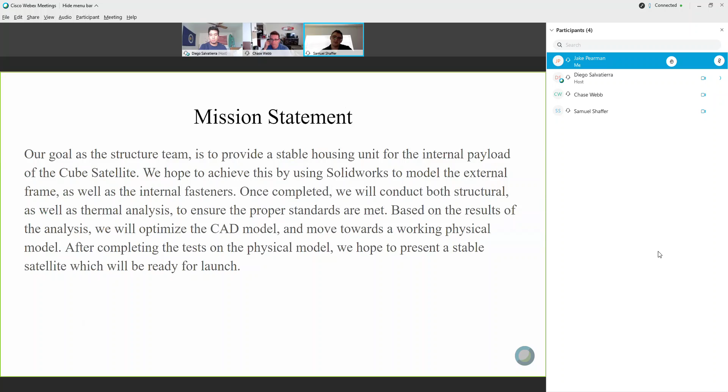Right, so there's specific property tables that have been researched for the specific types of PCB boards. So we chose the most common one for this application, which would be like an FR-4 board. And we basically took those properties and we put it into a custom material so that we can get as close of a resemblance during our testing and things like that.

So I'm going to be speaking on the design, the draft, and materials concerning the design and model for our CubeSat frame. What we have here is version 4.1 of our drafts for our CubeSat satellite. We've actually right now progressed marginally forward to 4.3, where we have standoff shelving on the internal structure of the arms for the spacing for technologies and experiments.

It's irrelevant to the design, so we decided for drafting purposes to stick with the 4.1 draft for this area. Mass is only varied by about 5 grams without the standoff attachments to the arms. So as of right now, you have on the left side of your screen the full assembly, which is set up by a trimetric perspective, as well as the front, bottom, and top views.

Moving to the right here, we have the main assembly frame components. PCB board being a vertical component and a horizontal component, where one length is longer than the other one. Then you have the vertical assembly arm, and below that are the top and bottom panel, which are exact copies of each other, just mirroring each other on the Y plane. Now, the vertical assembly arm is actually faceted through the perpendicular plane of the top bottom panel.

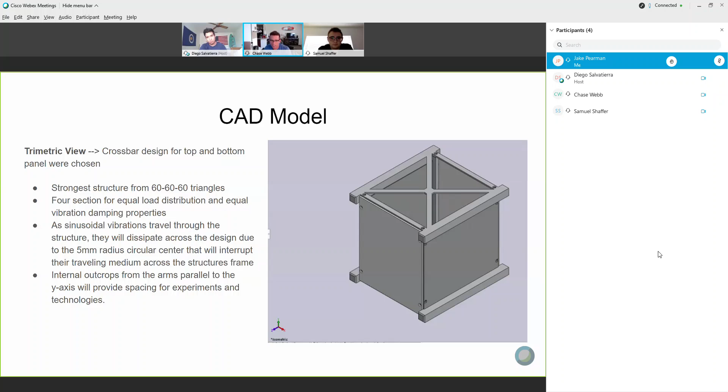Now, after some market research and industry analysis, the production of the CubeSat will most likely have to be done with a CNC milling process, which will include the 6 parts, 4 arms, and 2 top and bottom panels, all made from aluminum 7075 T651, which will be anodized at finish, and we'll have the deployer arms, which are the outer ends of the top and bottom panel, brushed. The metal will be brushed so that they will be compatible with the deployer system in the ISS.

The machining will probably be the most expensive part of the process, but after going to different manufacturers across the European Union and the United States, we do meet nominal requirements and minimal tolerances for manufacturing. These CNC companies do require minimum thickness, nominal tolerances, and minimum drilling spaces.

And as of right now, I haven't encountered any problems with our current dimensioning and their minimal requirements. So as of that, we're compliant with manufacturing standards so far and knowledgeable of their requirements. Next slide, please. Actually, I'm quite sorry. One slide, please.

Did not touch on this, but the rough estimate for our CubeSat cost, including materials, production, CNC milling, anodizing, and brushing, will be between $2,000 and $6,000. The final approximation, maintaining a high quality of materials in production, in my professional opinion, is around nearly $5,000 for all of the components assembled, anodized, and the deployer arms brushed properly. Next slide, please.

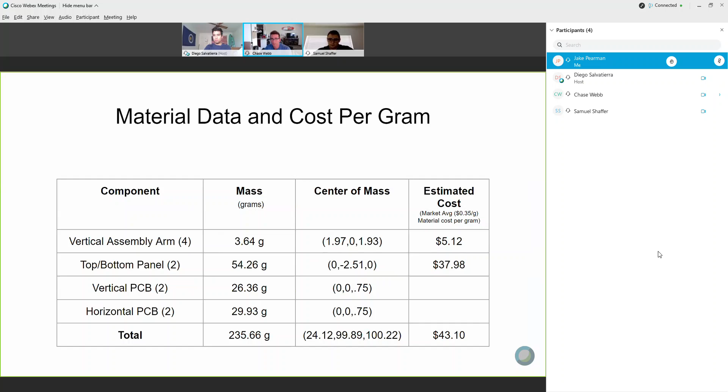So, just to prove my point, machining will be the most expensive part of our production, and that's why it's very vital to have someone who's going to go out to the market and shop smartly and understand that we have a competitive edge if we get different price points throughout the market and compare openly and transparently with our possible manufacturers so that they can compete for us. Okay, and next slide.

In small volumes, like I said, the robotically sprayed coating has a premium, so it's easier for a robot to do it, but if it's a smaller volume, the price might be more than what it needs to be for us. Next slide, please.

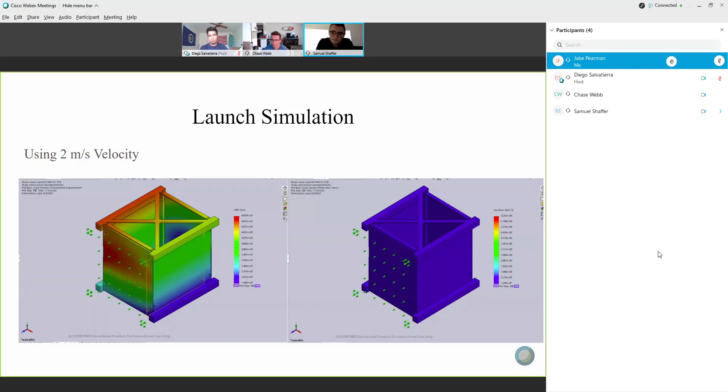So one of the ways that we're looking at fixing that is to add another crossbar, like you see on the top of the Y face there, by adding that on the PCB faces and then fixing it with a fifth screw hole. By doing that, then we can eliminate that flexure, and through the optimization process, we should be able to do it with little to no weight change on the overall model. If you want to go to the next slide, it's essentially about the same thing.

The only difference is the testing condition is with the 2 meters per second squared acceleration. The acceleration did flex a little bit more at the initial than the velocity, which is to be expected as it's more of an impulse. But what happened with these models is that over time, and like I said, this is within a matter of a couple seconds, right? The initial force being applied will cause a slight deformation and a little bit of a wiggle, but then it will even out and there won't be any deformation. It will basically be a static and rigid body.

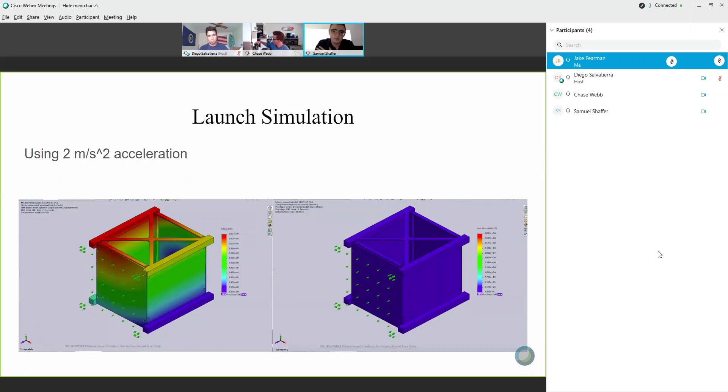So what we're going to be accounting for is that initial force, so that it's static and rigid throughout the entire launch process to ensure the safety of the payload. The specific values that we're using here are per the NanoRacks provider's documents for the launching conditions from the P-POD deployer. If you go to the next slide.

So we have the heat flux simulation. This is using the solar flux. This value has been researched, and they found it to be about 1,353 watts per meter squared. So as of right now, we are still processing this particular data, and we expect this particular data to shift once we apply the coating for the shielding. That will help with the thermal flux and things like that we'll encounter.

Diego, do you want to do the next steps?

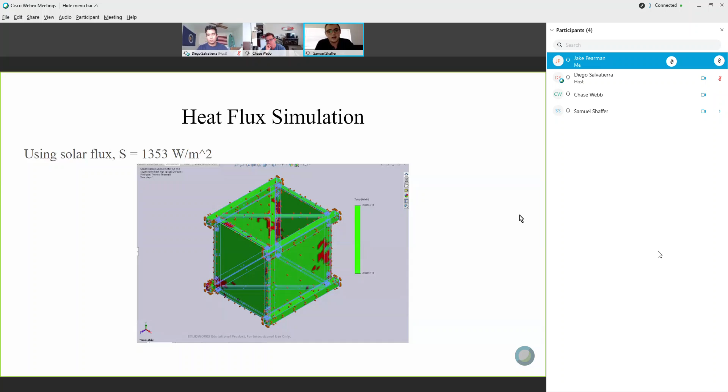Diego, you're muted.

Thank you for that. Yeah, so for feasibility, we're setting around $100 for hardware. This includes fasteners, epoxy. The reason why we put so much is just because we might have some models that we make, and we're obviously going to have to use some fasteners for that. So we're not expecting to go anywhere over this at all. In fact, we're going to be way underneath, kind of like what we were looking at, probably around the

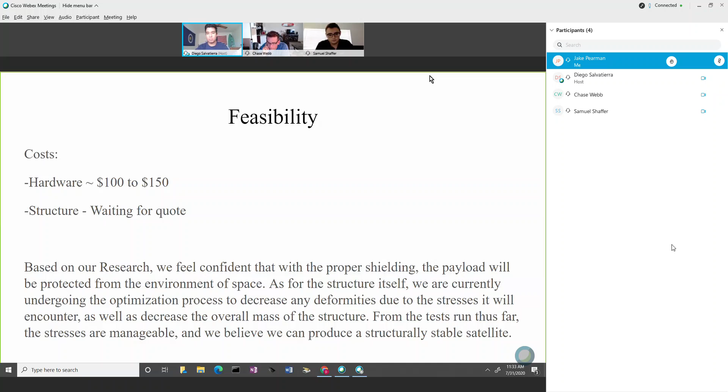As for the structure itself, we're currently undergoing the optimization process to decrease any deformities due to stress it will encounter, as well as decrease the overall mass of the structure. From the tests so far, the stresses are manageable, and we believe that we can produce a structurally stable satellite. Real quick, I want to show you something. It's the other way.

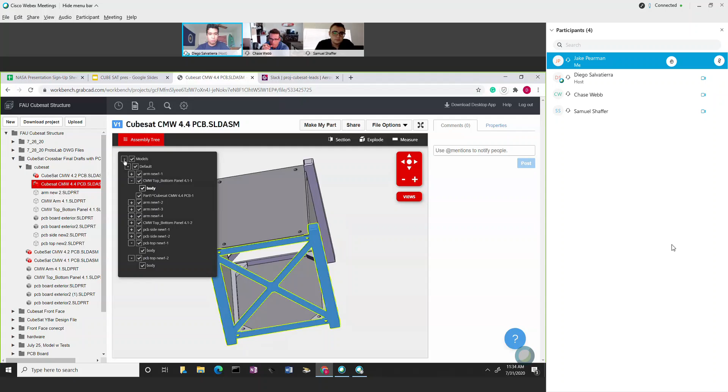Right. So for our next steps, as you can see here, we have the 8 holes for our standoff screws. Really, our next steps are we have 3 goals: maximize space, minimize weight, and maximize strength. So one way we can do that, we talked about the X bar design right here on the top and bottom, the Z plus and Z minus faces. That's good for strengthening, according to our simulations.

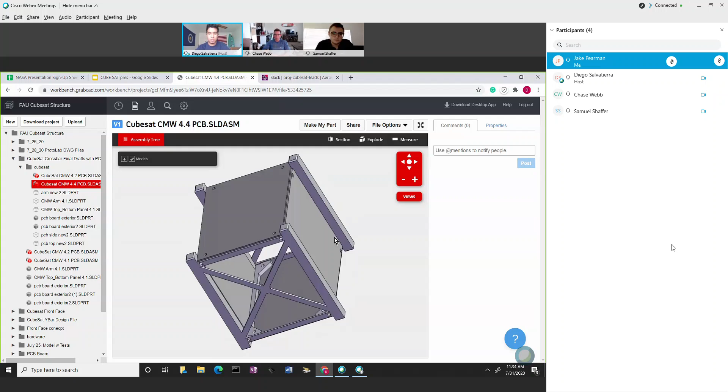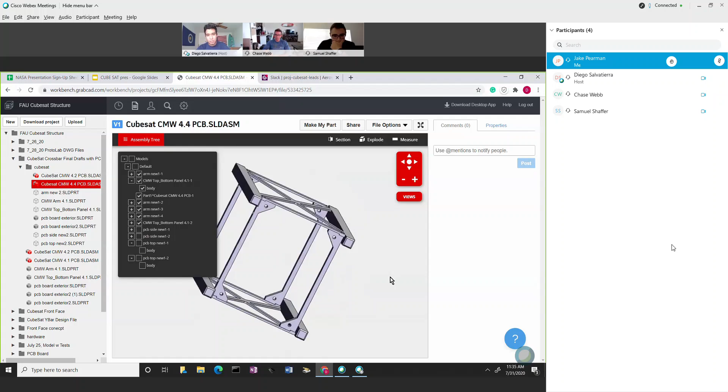And then the next thing we can do to maximize space is to fine tune these arms. If I can just show you real quick, I'll take away the PCB boards. Oh, take away the top one as well. So let me do this. Oh, sorry about that. Okay, so here you see that there is some space that we could maximize. We could move this slightly over to the right and this one slightly over to the left. We would have to run simulations on that, but really at this point, it's fine tuning.

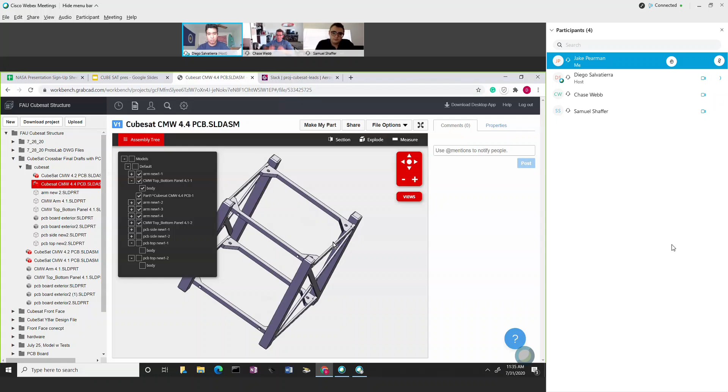Only because the inside of the structure is very simple. It's the easiest part of our design because we're going to be using standoff screws. That's literally all there's going to be inside for the skeleton of the structure. But really, we're focusing on the outside part, which is our hardest, most challenging part. All the internal design will be a lot easier as long as we maximize strength, minimize weight and maximize space. Go back to the presentation real quick.

Cool. So we're currently finishing TRL3, the simulation phase of the design process. On completion of this phase, we will move towards the 3D printed model to conduct physical tests on. Once the printed model has been tested and meets the requirements, we will create a prototype model using the actual flight materials so that we can confirm launch readiness. This is why we're putting aside the extra money for the hardware. During the time to flight, our team will be focused on stress simulations, finding a method to shield the model from those environmental elements.

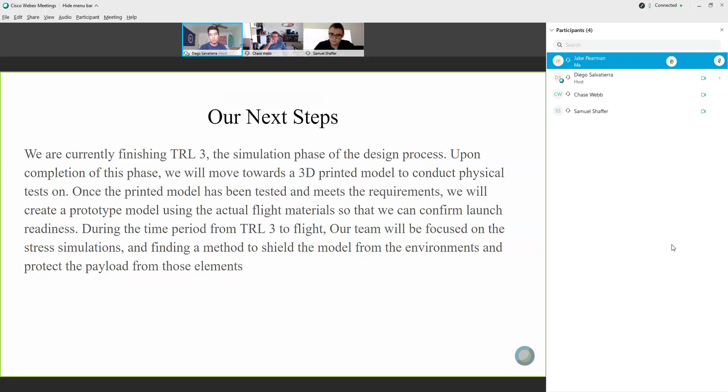Basically, what I said: visually, I tried to show you what we're going to do. Move the arms to the right a little bit, lower the weight, and do the simulations as we move on, so we can make sure that we're doing the right adjustments. All right, Sam, you want to go on this one?

All right, so further testing that we're going to be conducting on this: like I said, the current tests that have been done have been just the initial conditions for the Nanoracks P-POD. So what this is showing is per NASA. This is basically a specific test that they require in order for this to be deemed flight ready. So the right-hand column that you see here, this is the qualification.

So there are three columns where basically there's a proto-flight, there's a testing, and then there's the qualification. So what we're trying to shoot for, obviously, is the qualification. So the testing that we're designing for is for those optimum standards so that it's ready to go when it needs to on the first trip.

So what are some of those tests? We have the random vibration, sinusoidal vibration, a shock test, thermal vacuum cycle, there's a bake out, and then there's the strength analysis and the structural test. The vibration tests will likely be done in SolidWorks. As for the shock test, we're currently looking into using ANSYS to do that, and we hope to have these simulations done within the next week and a half to two.

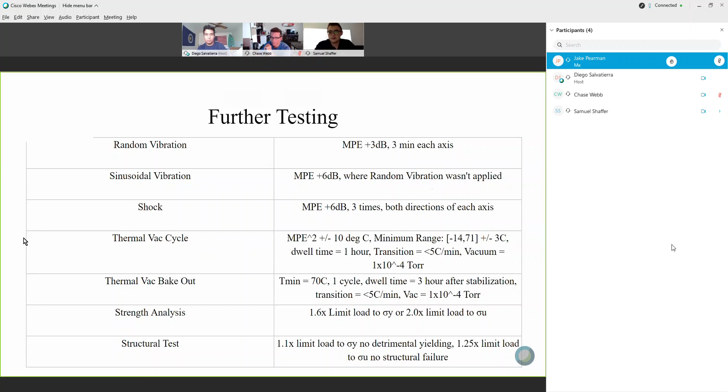Yep, that's it. That's it. Okay. All right, guys. Any questions about our presentation? Any questions about the structure, our next steps?

Go ahead. The angle you're referring to is the pitch between the inner and outer diameter of the countersunk screw. Yeah, we already have 45-degree pitch. Most countersunk screws are 45 just because they'll have less of an effect on any metal and breaking or nibbling away of the valuable metal. So 45-degree pitch is the standard. Even if you go to Home Depot, look at countersunk screws, it's usually between 40 and 47 degrees.

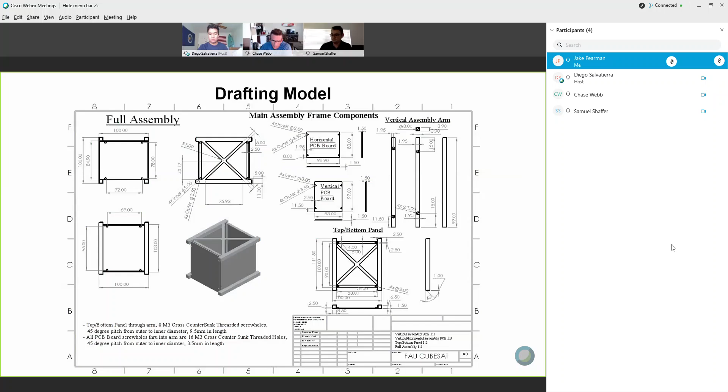Okay. I didn't see, I see you wrote it in the bottom left corner. Okay. Yeah, it's there. I include all that relevant information.

Perfect. The next question I wanted to ask, this could be anyone who wants to answer this. What is the reasoning between building your own structure rather than buying one that has flight heritage? I mean, if it's already been flight proven and tested on numerous CubeSats, and we as a team simply just adapt to that frame that's there, why did you decide that the best method is going to be to build and test your own? May I? Yeah. Go ahead, Chase.

Coming from the person who did the majority of collaboration and work for the design currently on hand, my forte tends to be in modeling, I'm not a simulations person. I'm not as knowledgeable on that. And my team lead, Diego, is amazing when it comes to organization and oversight.

For me, the reason that I think it's integral for us as a team, structures team, and as the AXA CubeSat for FAU to design our own CubeSat for launch rather than host our experiments on some already pre-done structure that has been flown and test proven, is because you're taking away the process of learning and also taking away the opportunity for a person to develop a new design or a new model that is either relevant or supersedes any other previous model design that could be out there.

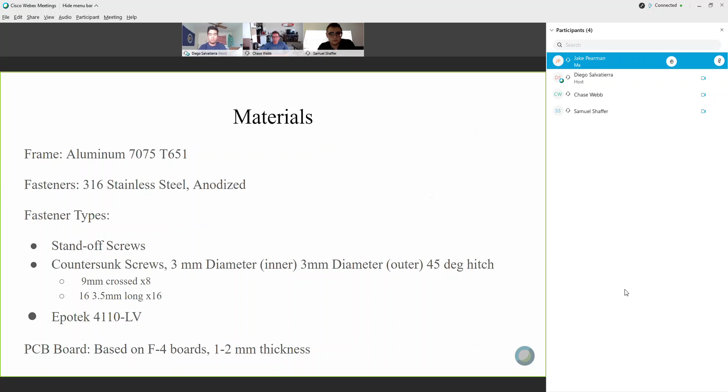And one thing I wanted to ask is, have you guys discussed how you're going to do the finishing on the rails? I know that the rails need to have a specific level of, I don't know if it's a brushed finish or kind of like a sandpapered finish. Do you guys have the? It is included. It's a brushed metal finish.

And Jake, per our interview with Proto Labs and Jenna Simmons, they did express that, at least in their CNC milling process, they can brush the metal on the PPOD deployer arms. And I believe it was at no extra cost either. They also mentioned anodizing the aluminum 7075 during the process as well when it was finished. Okay, awesome.

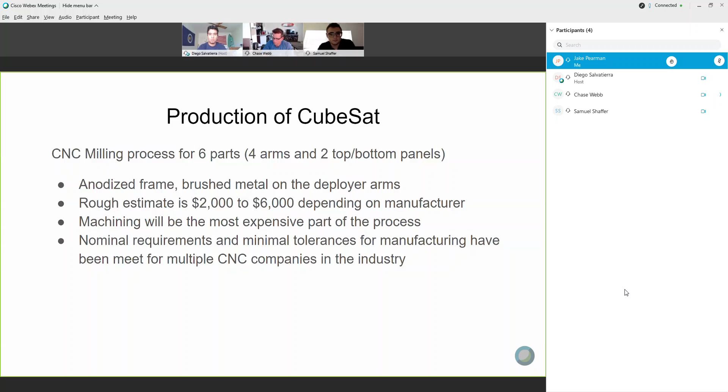So you mentioned the RF spray. What does the RF stand for? Radio frequency plasma spray. So is that going to inhibit any of the communications on the satellite? Do you know? Or for that matter, will the PCB boards be an inhibitor for the satellite to communicate? So for that question as well, like I said earlier, our talks with communications have to go up a little bit so we can answer this question.

I can answer the question in part. I've been reading up on the shielding. The RF plasma spray is supposed to cause the refractive elements of any sort of electromagnetic radiation from outer space to be deflected, while our radio signals are transmitted at a much longer wavelength.

They should be able to penetrate the shielding, but also we're emanating our communications from our antenna, which will be partially external from our satellite. So it shouldn't have any interference pattern towards it at all. Okay. Whether we use RF plasma spray or the atomic level wrap, either way, that's just for electromagnetic radiation mostly, which is a different wavelength.

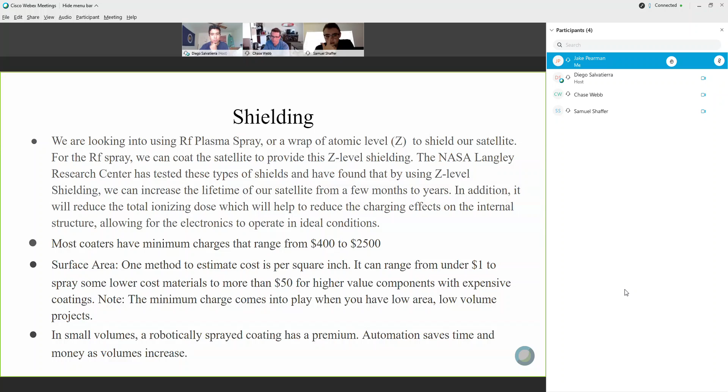So some documents there to start keeping nearby on a clipboard as you continue in your secondary process, and make sure you're contacting the communications team for that antenna, the power supply team for the solar panels, the environments team for this ODAR checklist, and just continue your testing with the experiments team, and make sure you're communicating to them ideas you might come up with for how to conduct testing in-house to save us some money. But you guys seem to be on the right track. I haven't seen any major holes in your subsystem so far, and just be ready for the next set of interviews in about 3 or 4 weeks from now.